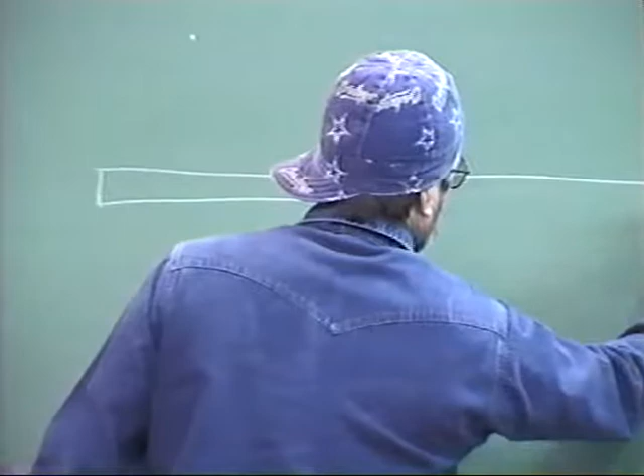What we're going to do is I've got some flanges. First thing we're going to do, we're going to take two pieces of pipe, line them up using framing squares and levels and so forth, and then we're going to tack them in place and make sure that they're aligned.

I'm going to show you how to do this with small pipe in pipe jacks, but then I'm going to show you another technique that will allow you to fit up pipe like this, even if each piece of pipe were 20 feet long and 3 feet in diameter. I'm going to show you a technique to use to line them up.

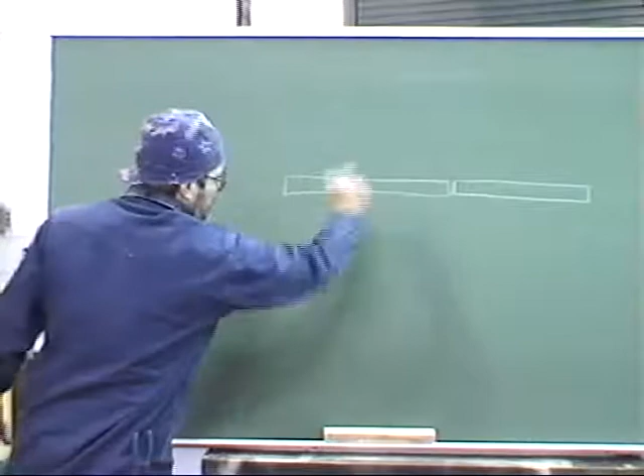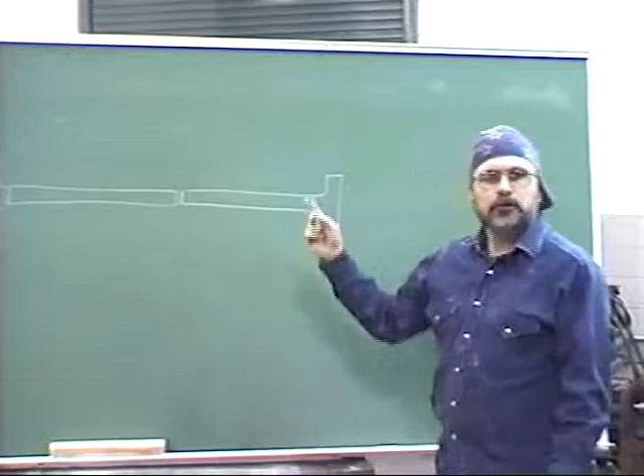Once we get this joint fit here, we're going to put a flange out here on the end, and we're going to square the flange with the pipe in two directions, two dimensions. Then we're going to come down here, put on another flange on this end, and we're going to two-hole these flanges with each other so that they're square with each other and also horizontally level with one another.

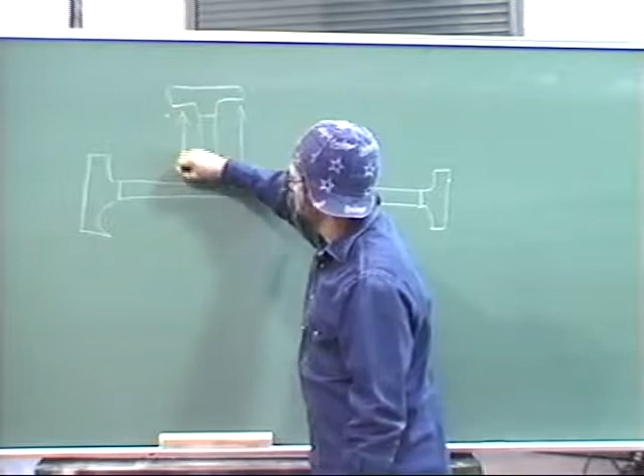Then we're going to come here into the middle of the pipe someplace, maybe here, and we're going to put another piece of pipe on here with a flange on top of it. I'm going to show you how to square the flange with the pipe, both in this direction, but also two-hole with it this way.

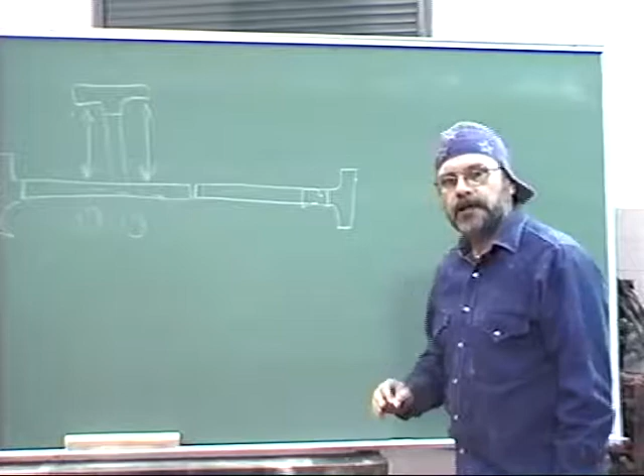And one thing I left out, we're going to put a reducer in right here also, so we'll have a reducer go down to a smaller flange here. So that's basically what it's going to look like. You can see we're going to have 1, 2, 3, 4, 5 welds when it's all done. We're not actually going to weld them out, but we're just going to go through the fit-up techniques.

So first thing I want to do then is read from your book on page 222, all of these numbered items here. This is how your author suggests that you take care of this pipe.

You're going to align the pipe or pipe fitting as closely as possible and hold it in this position. That's your first step. Second step, weld a single tack in place. Third, measure the location of the pipe or the pipe fitting. Fourth, if necessary, adjust the position of the pipe or pipe fitting until it is in the specified location.

Fifth, weld a second tack weld opposite the first tack weld. Sixth, check the location of the pipe or the fitting again, and if necessary, adjust the position. And then finally seventh, weld the two remaining tacks.

So our author says we're going to put 4 tacks in it, and I agree with him. This is the way we always do it. Here's looking on your pipe.

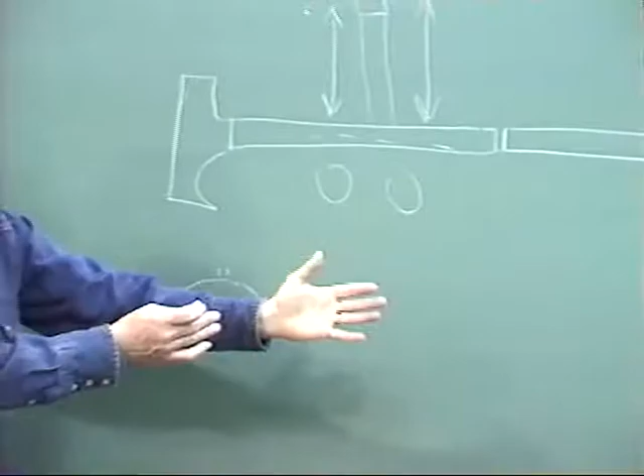Our first tack's going to be right here on top, and then we're going to make sure that our pipe is level. Once we get it level, we'll go ahead and put the tack on the bottom. Now we can still move it sideways. So once we get these top and bottom tacks, we're going to roll the pipe 90 degrees and make sure it's level and square, and then we'll put our other 2 tacks on.

And that's how we're going to make our first fit. Now we're going to do a little tack welding here.

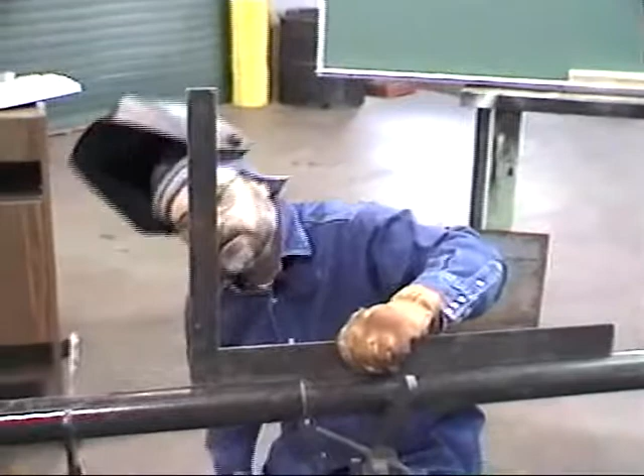Now the way we want to check this, first of all, we're not really all that concerned with these 2 pipes being level with one another right now. What we are concerned is that they're the same elevation. Remember, when we make the fit up, we're only allowed 1/16 of an inch of mismatch on the inside of the fit up. So you can see, well, you probably can't see, but we're a little bit low here.

So I either have to bring this pipe up some or lower this pipe down some. So I think it would be easier just to go ahead and lower this one down. And now my level is touching, and right there looks pretty good.

Okay, now to get a temporary fit, I'm going to go ahead and drop or raise this one here.

Let's bring it in closer. These aren't the best pipe jacks in the world, but not bad. Okay, so that's pretty close.

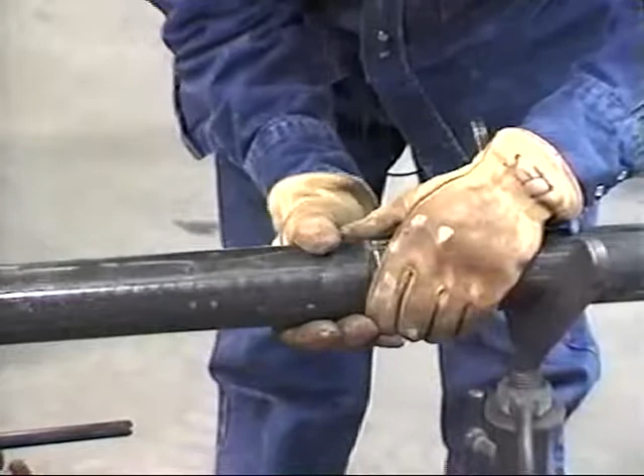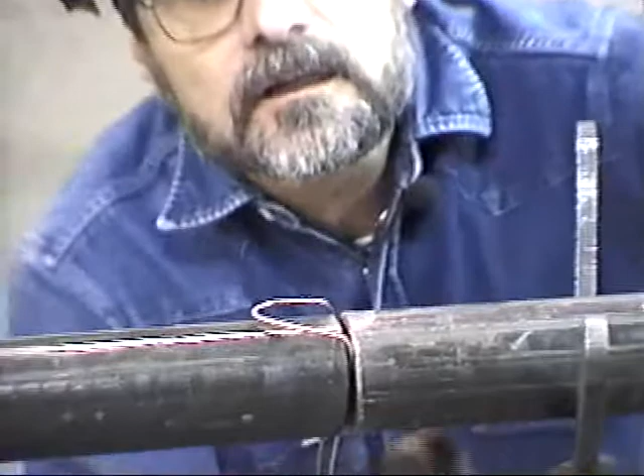Now we want to get our root opening, using a 3/32 gap rod, just like we do when we're welding pipe. I'll grab one I've got laying here. We'll put our gap rod in there like so, and hope it stays. One trick is to bend it like this, put it in, fit it up like so. Okay, that's pretty close right there. So we're going to put our first tack on. Cover the eyes.

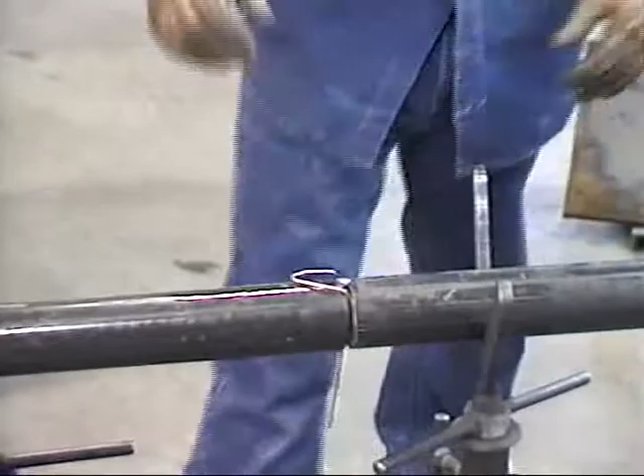Now you can see I'm using MIG to do this fit up. MIG is real convenient to do fit up, especially if you're working by yourself.

Now you can see I rotated the pipe. What I can do now to make sure we're level is put two levels on it, like so, and just check the bubbles.

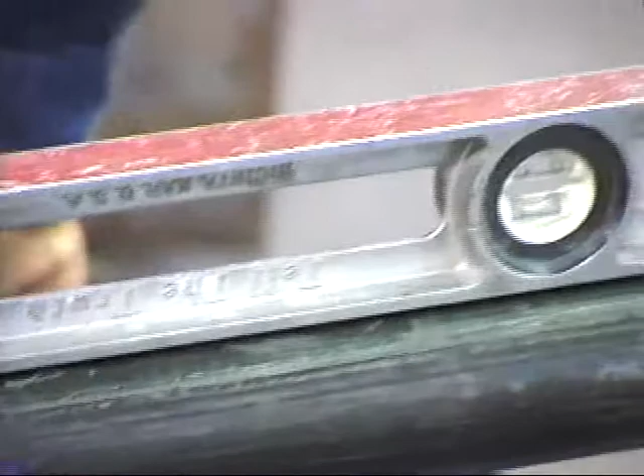This one is riding the right-hand line. This one is riding the left-hand line. So we're going to have to bring them in, starting by leveling this piece. I'll just lower this.

Correction, I'll just raise this. There we go, till that's level. Check it here.

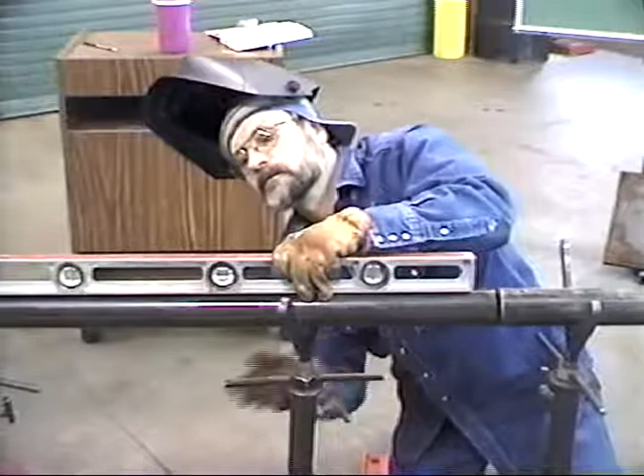Wish I had some better pipe stands. This pipe's awful light for what I'm doing. I just don't like these pipe stands.

Okay, right there. So we're level here, level there.

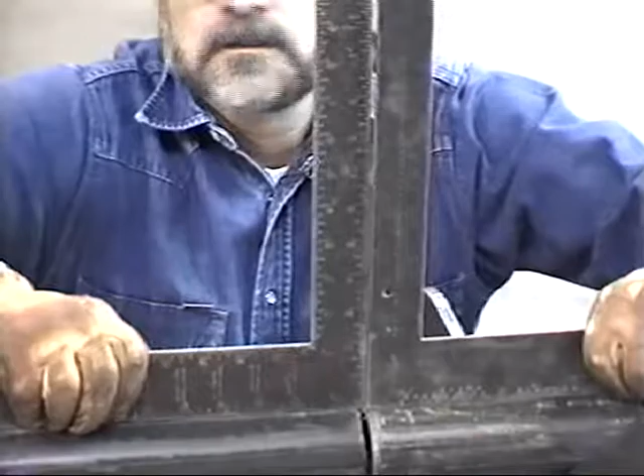Now a way to check it is to use two framing squares. Put a framing square on each, bring it in, and you can see at the top it's touching, but we have about a 3/32 opening at the bottom, so we've got to make an adjustment somewhere. We can make that adjustment by dropping this in, and that'll kick that in.

I probably should have used heavier pipe, it would have been easier. All right, let's see what we have now. Also, if you have a helper, it really helps a lot to do this. Still not there, but we're closer.

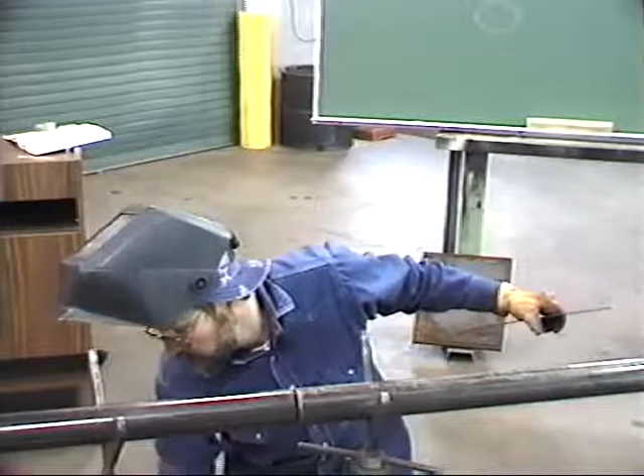So let's drop this in a little bit. See what we've got now. Still not there. These pipe stands are just a pain in the butt. Okay, now that's pretty close right there.

So I'm going to put a little bridge tack on there. Notice I said a bridge tack - that means that tack will be removed before we make the weld. Cover the eyes.

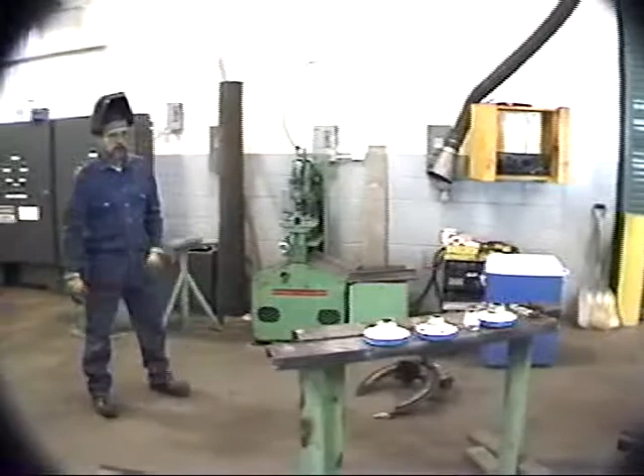Okay, now we're going to rotate the pipe 90 degrees. But before we do, let's take a look at it, step back and look down the length, put an eyeball on it. Okay, we got a little bit of a dog leg in it, which was to be expected.

Check it again. Okay, that got most of it off. So now we're going to go ahead and rotate it because we're going to be pretty close right here. Put our squares back on. Okay, it's got to go down in the middle.

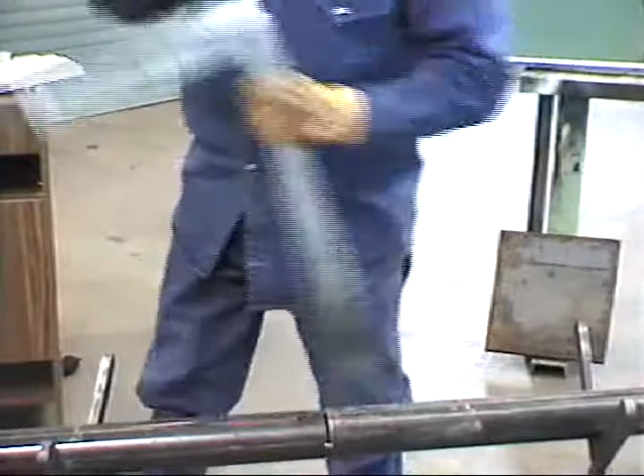Okay, that's fairly close. It came down a little too far. Okay, there we go. So now we're going to go ahead and put a tack here. We've got them aligned. Eyes. And I rotated the pipe again, and I'm going to put my last tack in.

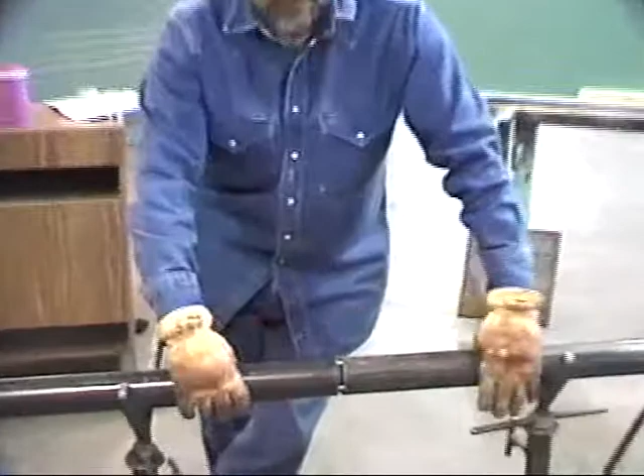Now, one thing I want to draw to your attention is, if you can get a look at this joint, you can see that's pretty wide - more than 3/32 of an inch, and it's not very consistent. The reason is this piece of pipe was cut crooked. We just cut it up here for demonstration purposes. We really didn't take the time to bevel it and get it fit up to where we had the proper root opening all the way around. Root opening on something like this, depending on the process you're using, would typically be 3/32 of an inch. So now we've got this on here - that's the first step of aligning this.

But now imagine we had pipe that was, let's say, 12 inches in diameter, and we had two 20-foot lengths. The same kind of thing you might come across if you're in pipeline welding, out there with your own truck. It's easy to line it up here where we got rolls and a little welding machine and levels and squares and everything, but how do you line up something that's that long? There's a little trick to it, and I'm going to show you what it is right now.

Okay, now if you can imagine this stuff being 12 inches diameter, each stick 20 feet long, what you can do when you're out there in the field - and I've done this often in welding shops. For many years I worked in code pressure vessel shops, building pressure vessels and piping to the ASME code for use out in the oil fields. If you have two long pieces of pipe and you want to make sure they're lined up properly, just get a couple of studs. In this case I'm using a couple of little bolts, but you can use the butt end of a used welding electrode, or just anything you can tack weld to the edge of the pipe.

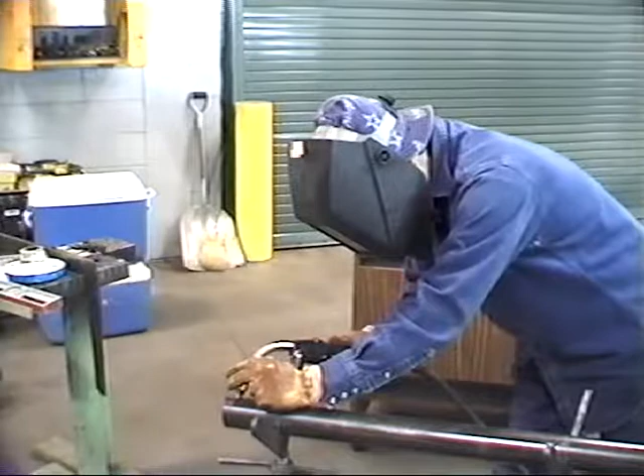Eyeballs. Well, now we've lost our ground. Let's try this again.

Okay, next get yourself a chalk line or a piece of string, and we're simply going to stretch a line from one of these to the other.

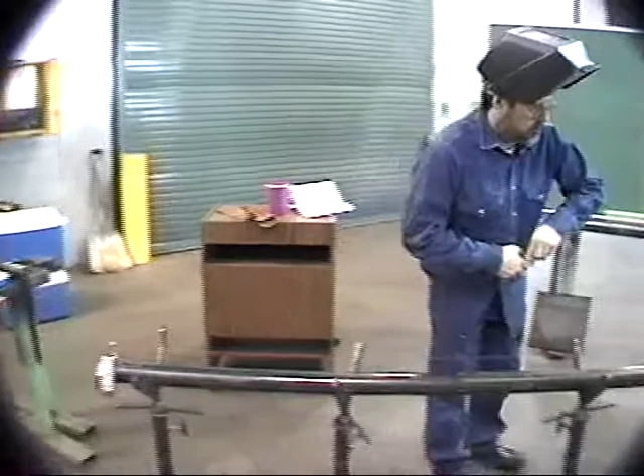Then with your tape measure, measure the distance from the top of the pipe to the line. I've got 1 7/8 of an inch to the bottom of the line there, and here I have 1 7/8 of an inch to the bottom of the line there.

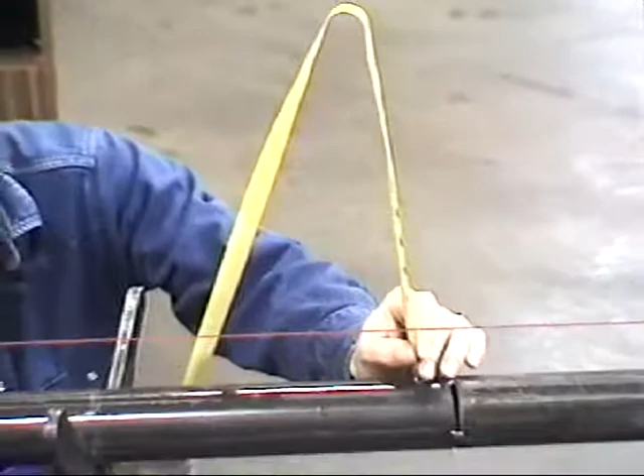Well, just looking at it now, I can tell we've got a slight bow here. And I have 1 15/16. So it's about a 1/16 of an inch lower here than on the ends.

Now this is just a small piece of pipe right here. If we were actually stretched over a 40-foot length, although we have 1/16 of an inch on this small scale, if we were working with 12-inch diameter pipe and this entire run was 40 feet long, that 1/16 of an inch difference would translate to about probably 3/8 of an inch. We would probably be off about 3/8 of an inch here over such a long run.

So you can simply stretch a string and align your pipe in this manner. And of course, when you're out in the field, what you're going to do is you're going to set it on the side, so it'll be laying down like that, and you'll move your pipe inside and out, and once you get it, you'll make your tacks, and then you'll roll it 90 degrees, and then you'll get your next bit. You simply have to move these. Excellent way, quick and easy way, and an accurate way to make sure you've got those pipe aligned properly.

Okay, our next step.

Now we're going to go ahead and attach a flange to one end. Now again, I haven't beveled this pipe, I haven't cleaned it up or prepped it very well.

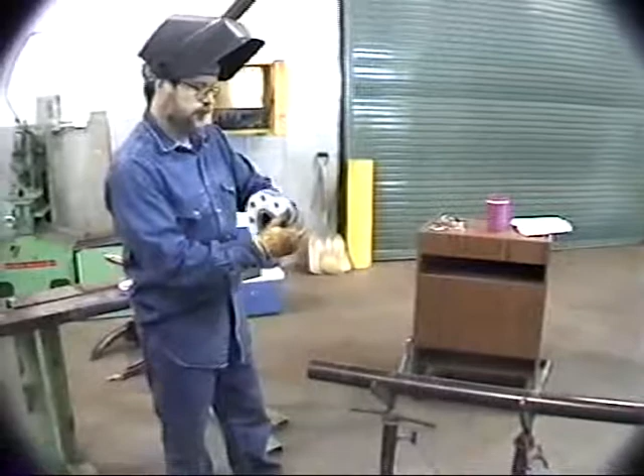What we're going to do is we're going to take a flange, and it's got so much paint on it I can't read it. But looking from how high that face is raised, I would speculate that this is probably either a 300 or a 600 pound flange. And what we'll do is we'll get our 2-hole pins and we'll line it up.

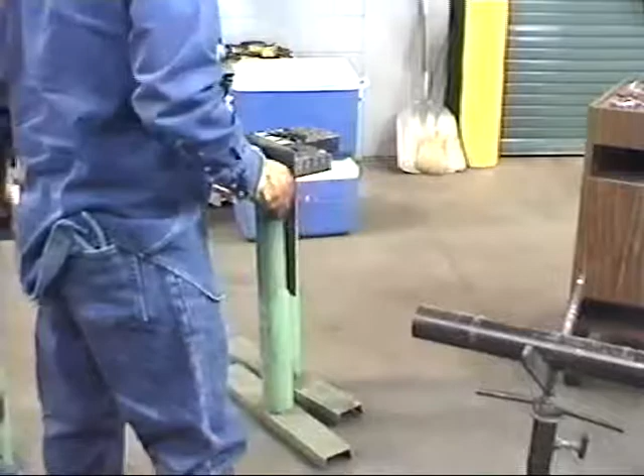Actually, we don't even need to use the 2-hole pins for this first one. We'll just set it on here like this, get our gap right here on the top, and I'll look inside to make sure that the ID is lined up with the ID here, and then I'll just pull it out a little bit and get our tack. This is much easier when you have a helper, but I don't have a helper today, so I'm going to try it on my own.

Since I'm working on just blank pipe right now, I don't have to worry about 2-holing it at the moment.

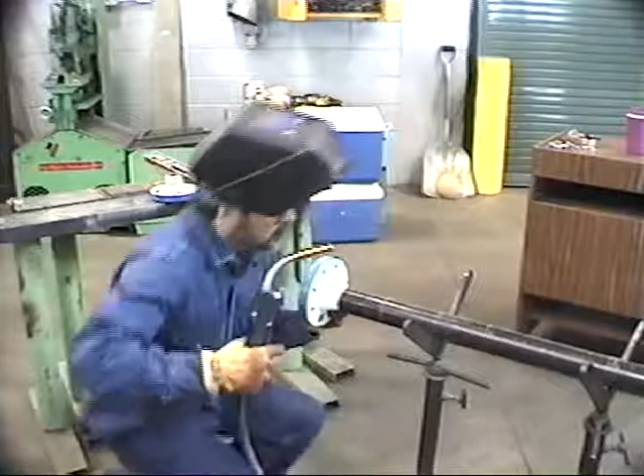Okay, that's our first tack. Next thing we want to do is check the level on our pipe.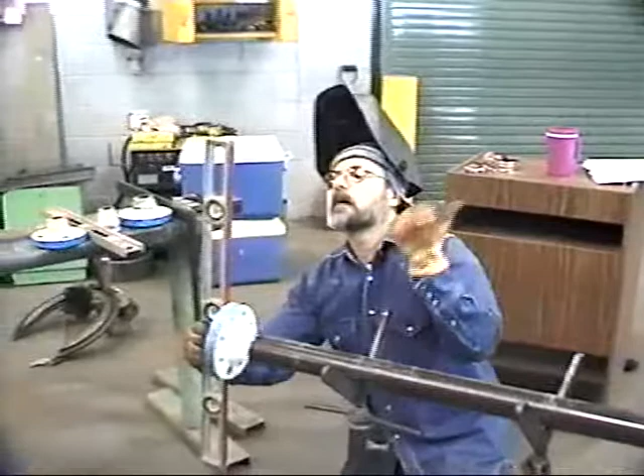Okay, once more, I'm riding the line on that side. So, I want to put this on here, and I want to ride the line on that side as well. So I've got to knock it down a little bit like that.

First of all, check your sides, though, to make sure it's lined up. Check your ID to make sure that's lined up. Remember, when you tack a weld, it's not only going to pull this way, but it'll shift sideways as well. So check your ID. Now, if you have to hit one of these flanges, make sure you hit it out here on the area away from the face. Don't ever hit on the face here, or you'll mess up that face and you won't get a proper seal. So we're going to hit it.

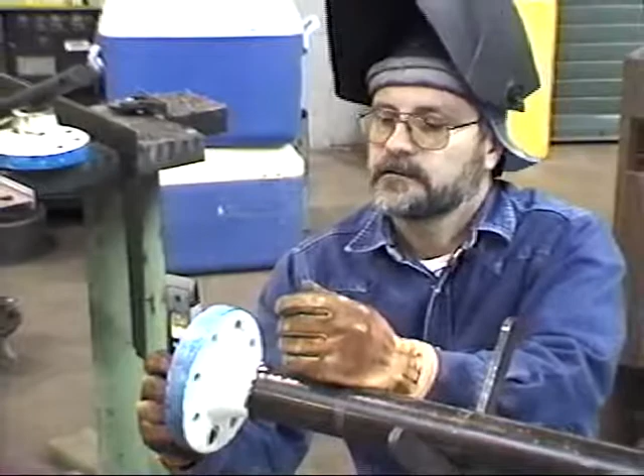Check it again. And because I didn't prepare this accurately enough, I'm going to have to re-tack it. Not enough room. Eyeballs.

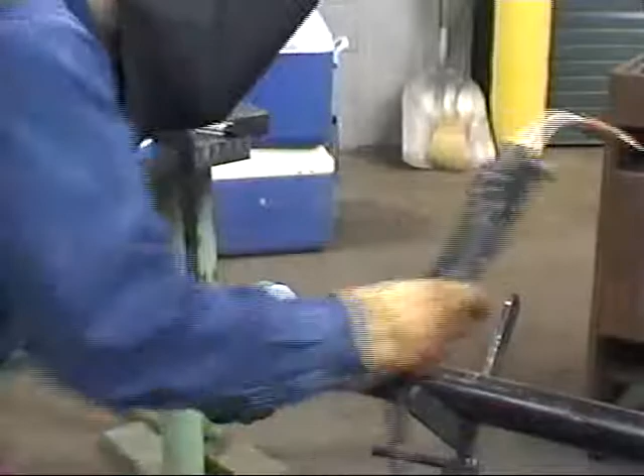Okay, check it again. Check it here.

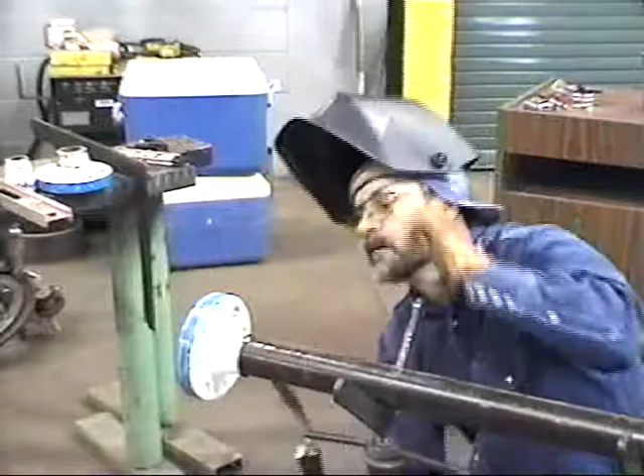Now we're going to tack it on the bottom. Then we're going to rotate it 90 degrees and check our level. Adjust it as necessary—I came a little too much.

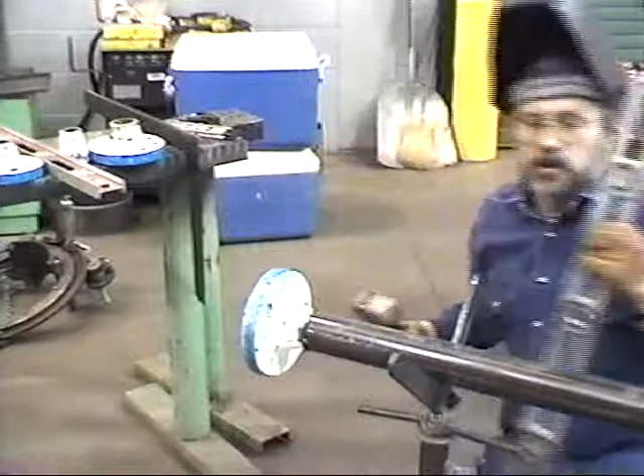Sometimes, once in a while, you'll find yourself in a situation where you can't get away from hitting the face. If that happens, use a piece of wood, a 2x4 or 1x4, lay it up against that face and hit the wood.

Okay, now that's where I want it. I left it just a little bit out because when I tack it, the tack's going to draw, and that should pull it fairly close to even.

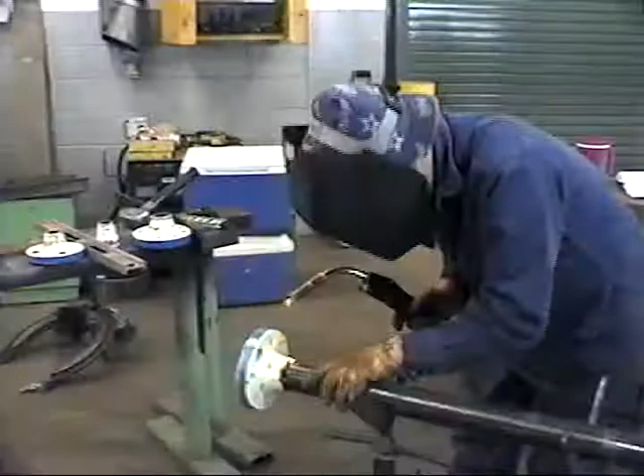Okay, our first flange is on. So we've accomplished two tasks—we've got two welds ready to make now. Now we're going to move down here to the other end and put on our reducer.

Now this is, I believe, a 2.5 to 2 inch reducer. 2 1/4—okay, it's 2.5 to 1.5. Oh no, pardon me, a 2 to 1.5 reducer. So we're going to put this on like so, and tack it on here, just about like that, right there. So again, our gap rod in here.

Check to make sure it's aligned properly. And we're not getting the ground. One reason you don't get a ground, or you lose your ground like this, is because of the coating that's put over top of the metal. So you've got to make sure you get a good ground. That's two or three times now I've lost my ground because of this coating put on the steel.

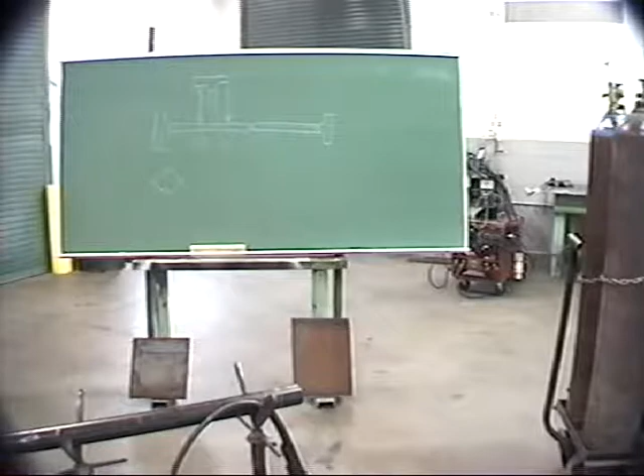So what I'm going to have to do is come over here, put that there so I'm making ground, and then we'll hook it up to here. That also illustrates why you have to clean your pipe up before you try to weld on it—you've got to get all that stuff off or else you can suck it into your weld. Okay, here we go again. Let's try it one more time.

Okay, that's our first tack. Now we've got to square this with the pipe. So you're going to want to take your level, check the face, and check it here. All right, we're just barely riding that line, so we're going to want to knock this down to where we're just barely riding the line.

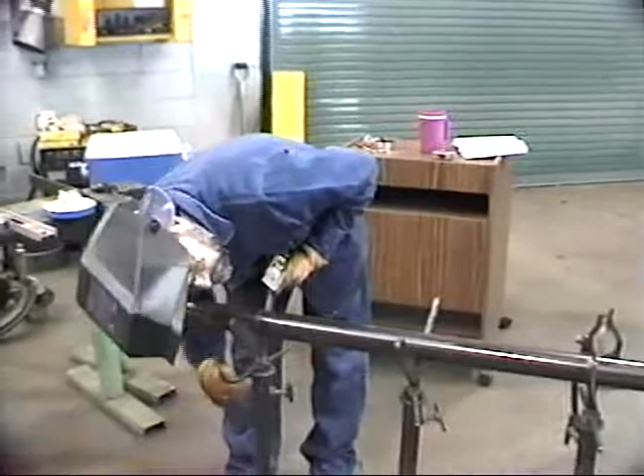Again, remember that we're using bridge tacks, which will be removed before we make the final weldment. Then you're going to rotate it 90 degrees, do the same thing, check it here. Okay, that's level. Check it there—got to go down some. Okay, that's good.

Lost that ground again.

Having a helper really makes this a lot easier job. And actually, being a helper is where a lot of people learn how to do this stuff. Working with a fitter, that helper gets invaluable experience in all of these little tricks and techniques.

Okay, at this point, now we need our two-hole pins, so let me step into the tool room there and grab them.

This is a two-hole pin. It has a little spring here and a little clamp—you press on this clamp and that'll slide off. What you do is put this into the bolt hole of your flange, slip this in on the other side, push it up tight and it'll lock. This is better than trying to just use bolts—a lot of people will just slip a bolt in there, but bolts are sloppy. This is much more accurate, so you want to make sure you use two-hole pins whenever possible.

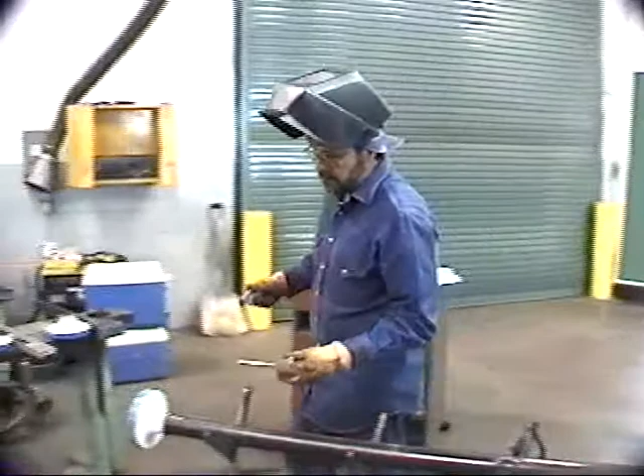So I'm going to come down here and we're going to two-hole this one. Put in that two-hole pin. You want to get as wide a reach as you can, so I'm going to skip these two center ones and drop down a little bit so I've got a wider expanse. Then we'll put our level on there, like so. Rotate the pipe till it's level. Now comes the tricky part.

Tricky part is getting it apart. Well, my two-hole pin seems to be broken.

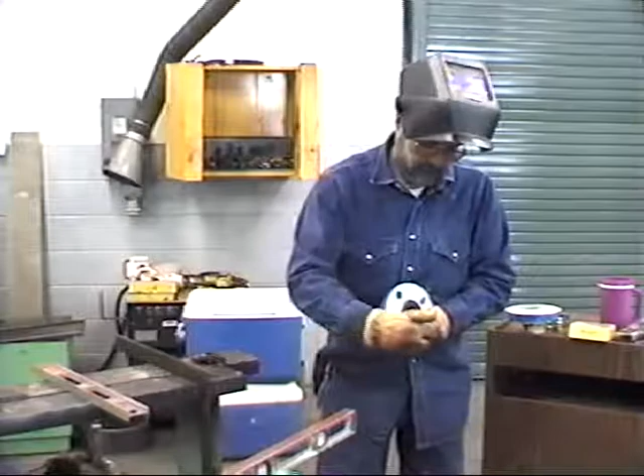Okay, now we're going to go with our smaller flange on the other end. So we'll put this on, and this on. Now if you look at that, there's only four bolt holes on this flange, and this is also a raised face 600-pound flange.

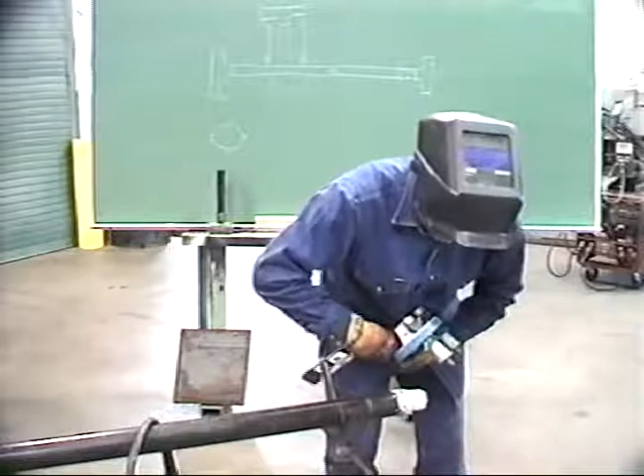So we're going to take our other level, and where'd our gap rod go? Aha, we've got our gap rod. We're going to stick our gap rod in here. We're going to put our level on here. Line it up.

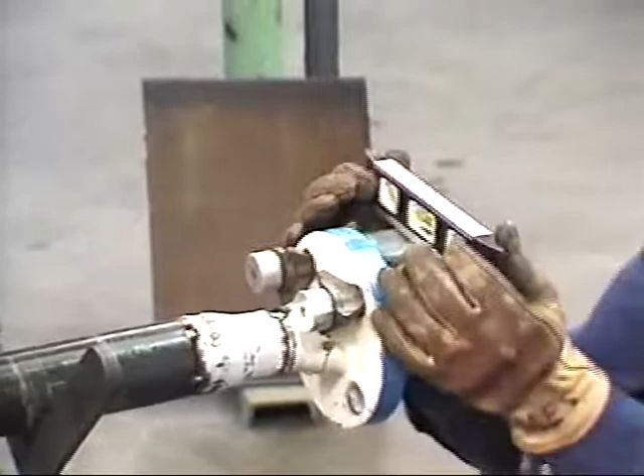This is where these quick change welding hoods really come in handy. Okay, not bad for being out of practice. Alrighty.

So we're two-holed there. It's off a little bit here. It's got to swing a little bit, so we've got to keep this pipe from moving. Fortunately, this is mild steel pipe, and I can just go ahead and tack it to keep it from moving for a moment. So I'm going to put a little bridge tack on it.

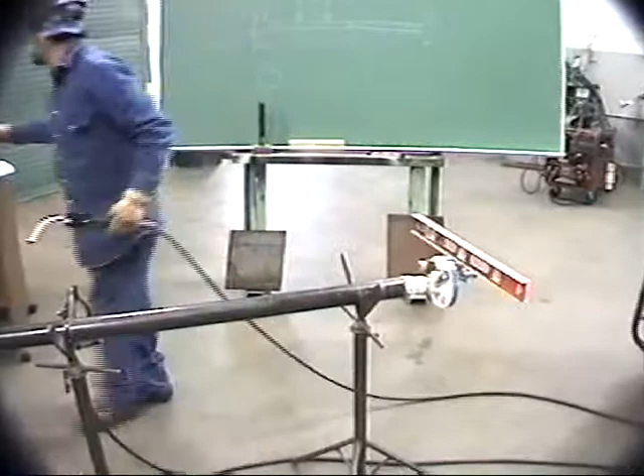That's level. We got to swing a little bit with this. Okay, that's level. So this and that, both flanges are two-holed to each other.

Another good way to check is to shove your level all the way back up until it stops against the two-hole pins, and do that with both of them, on both ends. Shove it all the way up until it's tight against the two-hole pins. Then just put your eyeball across there. Look across the top of this, and then look across the top of that other level. Keep looking at it like this, and you can make sure that the two are lined up.

Just off a tad. It's got to swing just a little bit more. So that's a final way to check, because you never know if your level is going to be off a little bit. But typically, if you've got a nice straight edge, you can use that technique, put your eyeball across there, and make sure they're properly lined up.

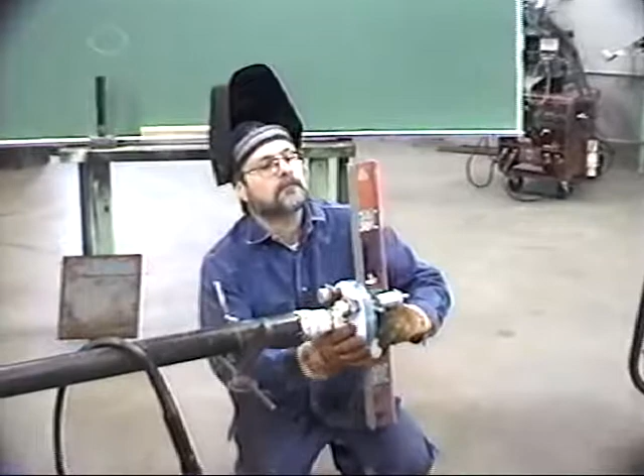Okay, once we're sure of that, then again, we've got to come back here and check to make sure that second flange is aligned. So we're going to put it on the face of the flange. And in this case, we've got to go out with it a little bit. And that's just right.

Okay, so now we're ready to put our second tack in, and we'll tack it on the bottom. So we're good there. Then we want to go ahead and rotate it and check it again. Okay, and tack it.

Now one final way of checking these is with your tape measure. If you're going to fit, you've got to make sure you know how to read a tape properly and accurately, down to a 1/16 of an inch. Most of these codes will allow a 1/16 of an inch. Pressure vessels usually allow an 1/8 of an inch. But you need to be able to read a tape measure if you're going to be a fitter.

Put it on there and come over. 81 1/8 of an inch to the face, okay? Rotate it, check the other side. 81 and just over 1/8 of an inch. So we're within about a 32nd that way.

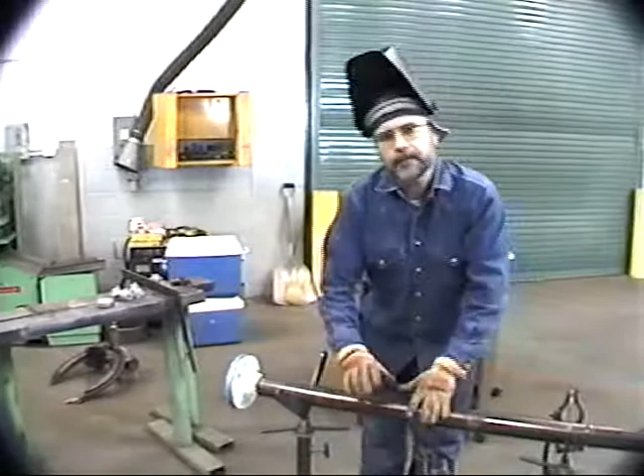Now, one other thing I want to point out to you. If you have to cut a piece of pipe and put a couple of flanges on, and that pipe's going to go into an existing system, it's going to hook up to something. One thing you need to be mindful of is the thickness of the gaskets that are going to go in here. Whenever you calculate how long that piece of pipe should be cut, you've got to deduct for the thickness of your gaskets, and deduct for the root opening on every weld that you're going to make. Otherwise, you're going to cut your pipe too long. If you're going to cut a pipe wrong, it's best to cut it too long. But with practice and experience, you'll get to where you can cut them right the first time, every time.

So now we've done 4 of our welds. We're done here, we're done here, we're done here, we're done here. So now we just have 1, 2 more to do. Excuse me one moment while I gather that up.

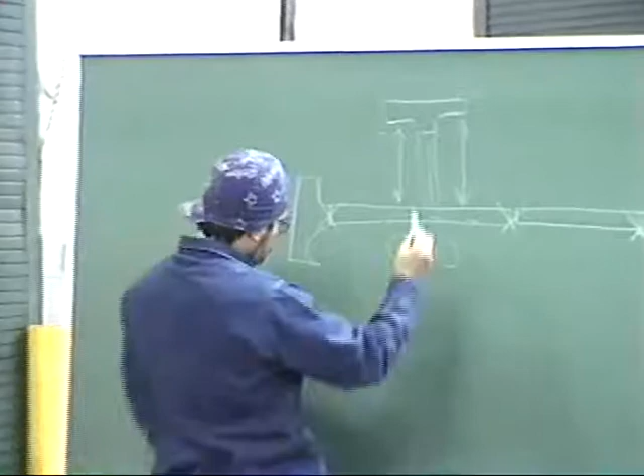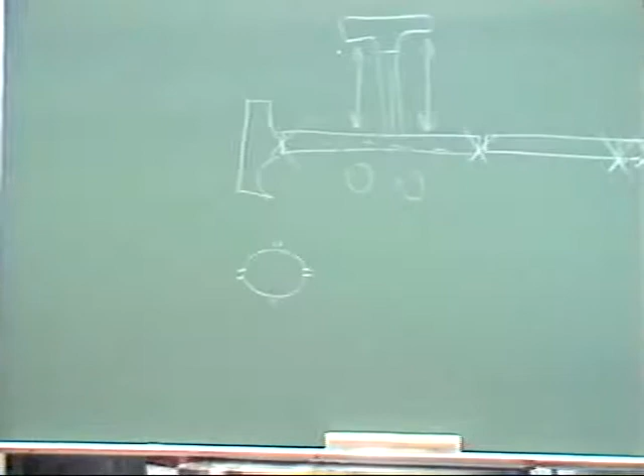Okay, what we're going to do now is put on our branch, and we're going to put a flange on it. Typically, the flange is welded onto the branch prior to installation on the header or the main piece of pipe. So what we're going to do is take our little flange here, and let me drag this over. Find a relatively flat place, lay that down, put our gap rod in there, move our ground, and then set our pipe.

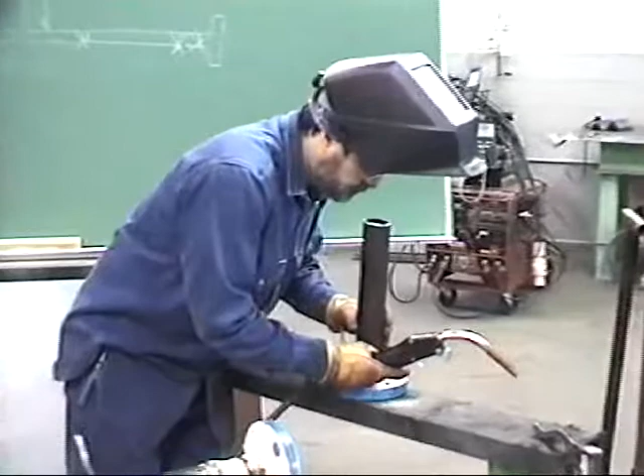Eyeballs. Okay, same thing here. We've got to square everything up.

So now I can lay this on the back of the flange, and when you do, you want to make sure that you're running with your bolt holes. That way you keep everything square. Okay, it's perfectly level right there. Let's take out the gap rod now.

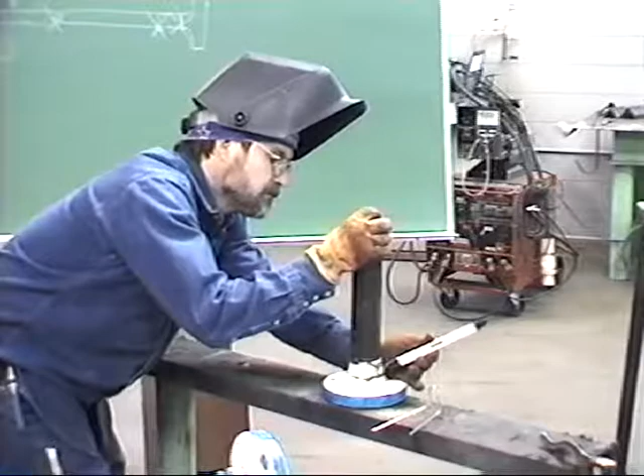Got to open it up some. Okay, we'll put our second tack in. Lost our ground. I hate it when I lose my ground.

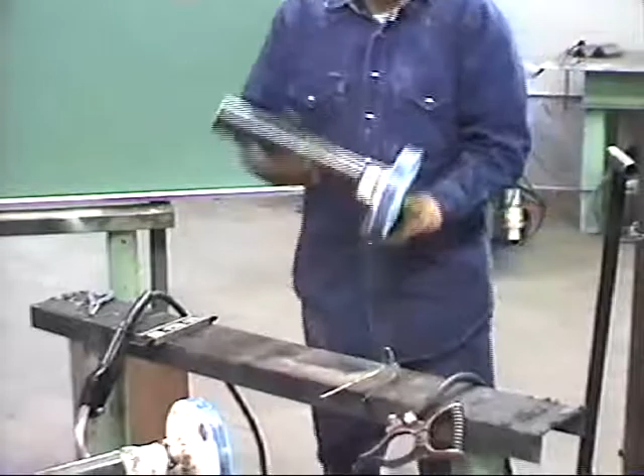Eyes. Okay, then now I can tell we got a heck of a dog leg in there already, so before I try to check it with my level, I'm just going to go ahead and make some gross adjustments to it, and just eyeball it fairly close. Like so, then set it back down.

Recheck. Okay, it's level. Okay, it's got to scoot over this way a little bit, so I'll put this tack in first, and that should draw it enough to where it's pretty fairly level. Eyeballs.

There we go with that darn ground again. Then finally come over here and put your last one in.

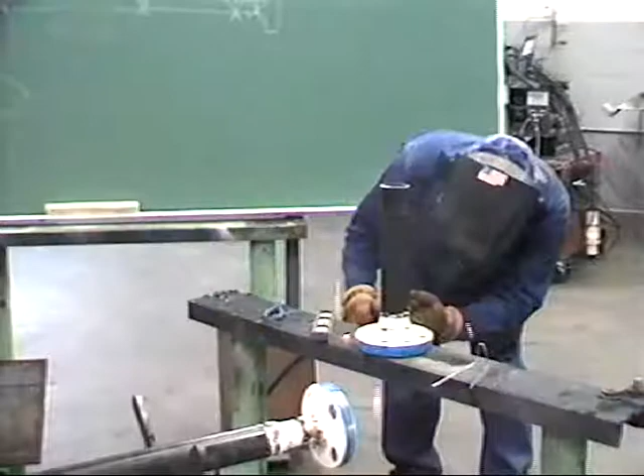Okay, now typically, of course, you'd go ahead and complete this weld now before we ever put it on the pipe. Now the way a branch is usually attached, there's actually a couple of ways.

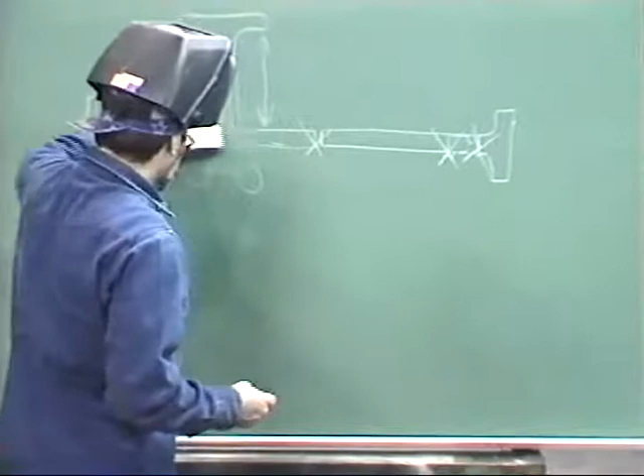And somewhere in here, you might put a T. If you were to put a T in, you'd have 1, 2, 3 more welds. Okay? Another way to do it

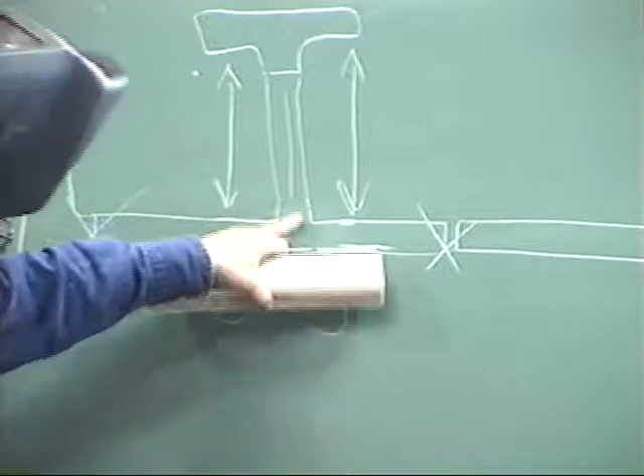is to simply nestle the branch into the header itself, like this. Then you have one weld.

Under ASME Section 8 pressure vessels, this is allowed, but you don't typically see this out in the field anymore in piping. Almost always now you'll see a T-joint put in there.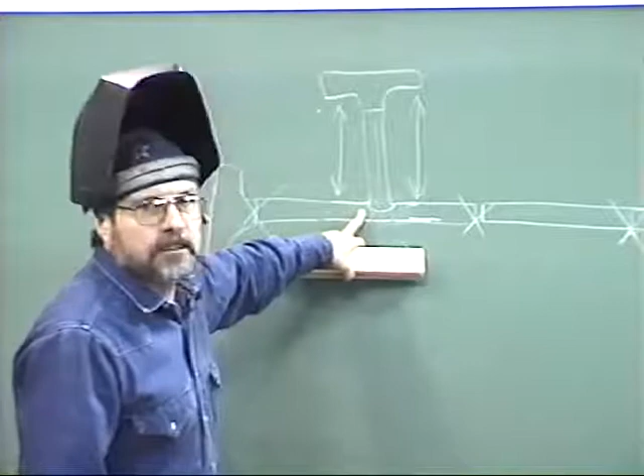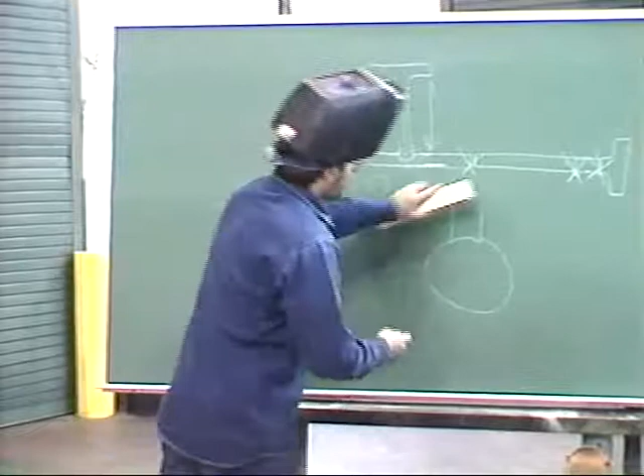If you have to fit it up like this, here's the inside of your pipe. This is our branch running up. Then you're going to want to radius this pipe to the ID of the main line. That way you don't restrict the flow any. And when you fit that up, you can only have an 1/8 of an inch root opening all the way around it.

So this would be your branch coming down, and then you'd have an 1/8 of an inch root opening all the way around. Full penetration weld is required.

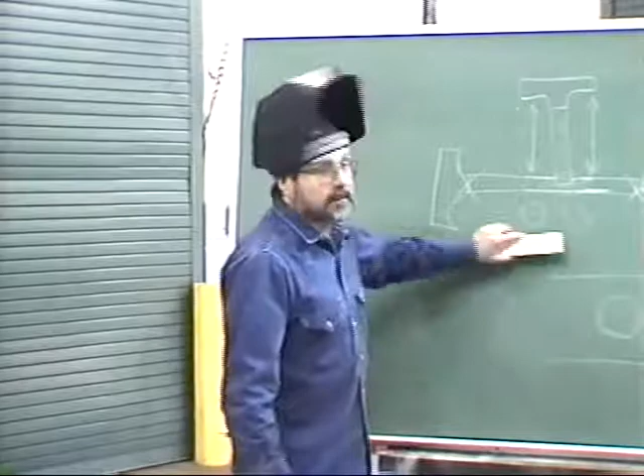Now, I have not taken the time to prep this to do a fabricated branch like this, and I don't have a T. So I'm just going to go ahead and tack it to the surface of the metal simply for illustration purposes.

Now, before we do anything, we have to find the center of the pipe. So we're going to put our two-hole pins back on. Now I'll use the good ones. And we'll level it.

Now I don't want it to move, so I'm going to go ahead and weld it with my little brace to keep it from moving. Eyes.

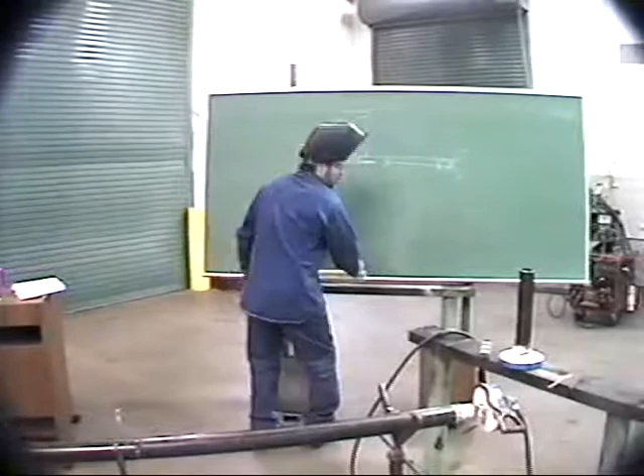Okay, it's leveled. Now our branch has to be level. If we're looking at this end on, here's our flange. Here's our pipe opening, and our branch is coming up like this. And that's what it looks like if you're looking at it from end on.

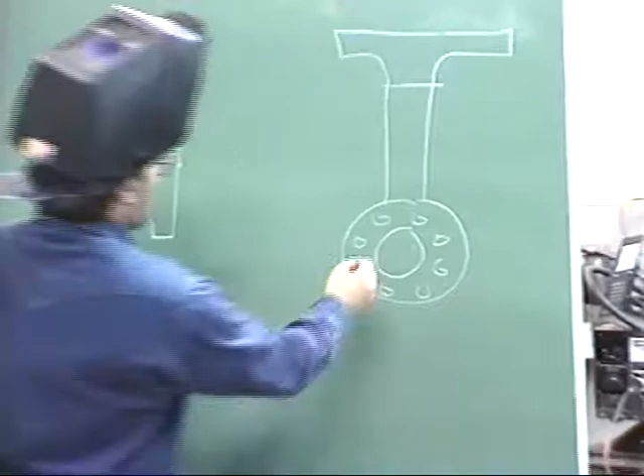Well, we've leveled this, so now this has got to be level, and the center line of our branch has to be even with the center line of our pipe. How do you do that? You've got to find the center of the pipe.

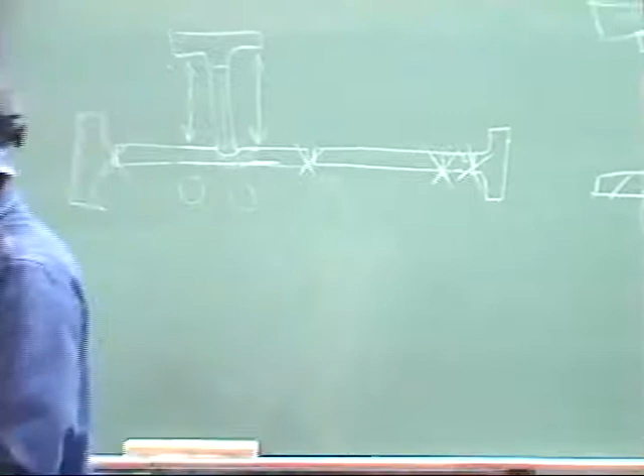Now you could use a little instrument called a center head. Now if you look at this, you'll see it's got degree marks across here, and then it's got a little bubble level right in the center. These things are pretty handy if you don't have to do really critical, really accurate work.

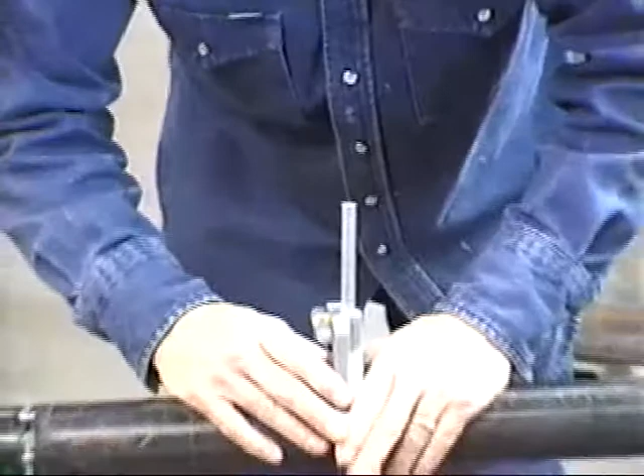Just for typical pipe fitting where you have like 1/8 inch tolerances, you can simply take this and cradle it on the pipe, check your level, make sure your two-hole is level, and then there you have it. So we just set it on here like this, right like that, and then just give it a light tap. And I say a light tap.

This is not a center punch. You don't want to really crank on it. You just want to give it a light tap, and then you've got a little hole there. Now you can go ahead and get a center punch and really punch it. Now, according to our center head here, that is the center of our pipe.

Well, I have a bad habit of not trusting center heads. Like I say, they're great for rough calculations, but to really be sure, you want to use a level and a tape measure to find the center of your pipe.

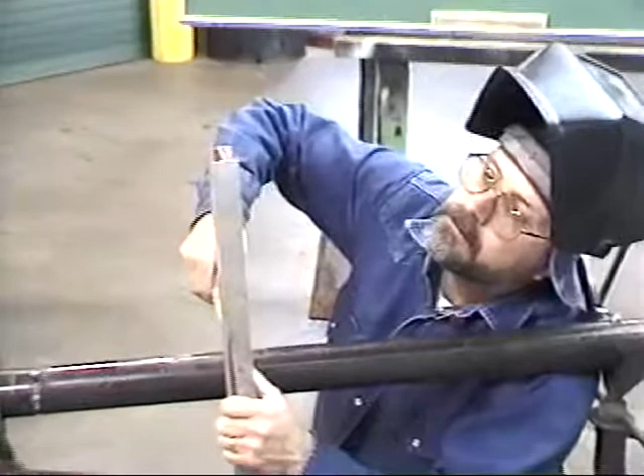And the way you do that is to simply lay your level on the side of the pipe and level it up. Use your tape then to measure. You go until it's level, and then you look. Okay, I've got 1 3/16 of an inch to that little center punch from the edge. Now I come over here, I'll check it again.

One 3/16. So we are accurate enough. That center head was accurate enough to go ahead and use it. So that's another way of finding the top dead center of your pipe, which you're always going to have to do. If you don't have a center head available, use a level and a tape measure.

Now at this point, if we were going to just fabricate this, we'd go ahead and lay this out, cut it, clean it all up, make sure you dig any trash out of the main line that happens to fall down in there before you ever make your fit up. Then you'll make your fit, and in this case, since I don't have a T, which is the way it really ought to be fit, and I'm not going to take the time to cut and bevel all that, I'm just going to go ahead and make this, put it on here like this.

Well, how do you know that it's level and running the same as this pipe, as our main line? Well, what you can do is rotate this 90 degrees, put 2-hole pins in it here, and rotate it until you're sure.

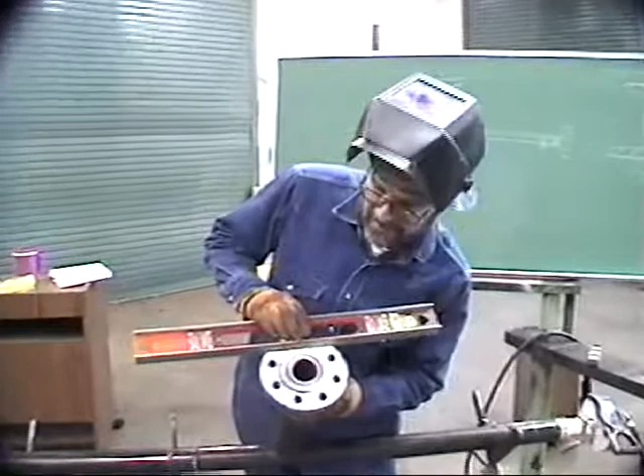Now, if you don't want to do that, or you can't do that, say this is fixed in place and you can't do that, then the way to check that is to take a level or a straight edge and rely on your eyeballs. You simply take this and line it up with a couple of the 2 holes like that. Then you know that the level is running square with the flange.

Once you've got it lined up square with the flange, trust your eyes. Look down the edge of the level and align the edge of the level with the side of the pipe. Then you can accurately, and I mean accurately, line it up. Right there.

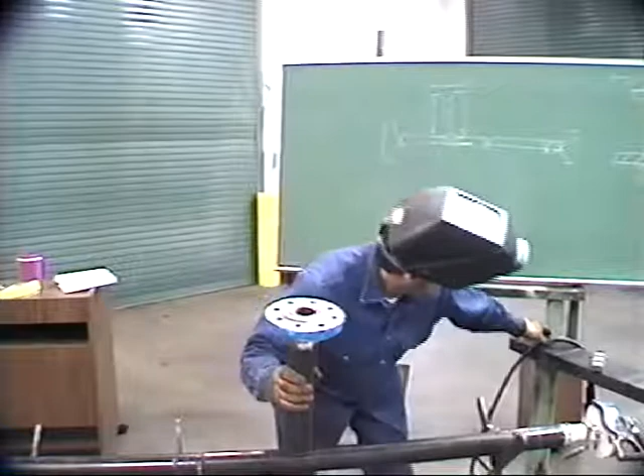And again, I wish I had a helper. So let's see if I can do this one-handedly. Let's check that one more time to get it close. Keep it close.

Eyeballs. Got to check it one more time. Why? Because we're off this way. Now that might throw our alignment this way off.

So what we want to do, raise it up with that one tack in it. Now if you can't, one really neat thing to use, if they're available and you have time, is to use what we call little pipe jacks. All they are is a piece of pipe with a bolt stuck in the end of it, and you can actually tack them here, then loosen them up until they come up snug here, and the flange just basically rests on those. You can make whatever minor adjustments you have to make sure you get it just perfect.

Now I happen to be really close here. Okay, we're riding the line there. I don't have room to set this here, and I don't want to go across that joint, so I'll come over here and go underneath, and I'm riding the line there. So I need to go over that way with it a little bit, like so. I want to hold it over there, so I'm going to use my MIG pliers as a little wedge right there.

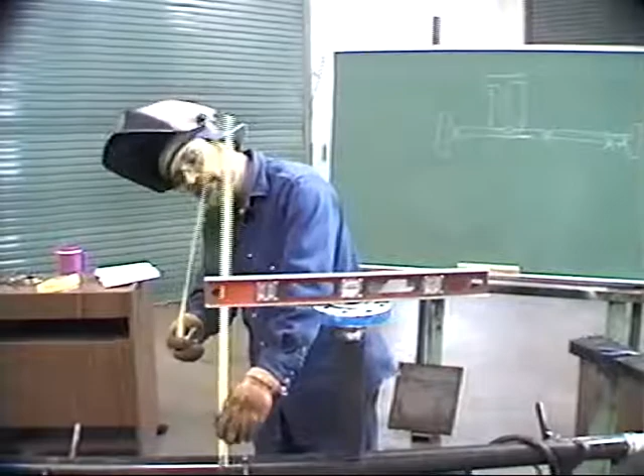Now, the final check on this thing, to make sure we're running square with the pipe, go back to your tape measure. Why? Because now you can get way out here on the end with it. 14 3/8. 14 7/16. So we're 1/16 of an inch off, which means we'd have to tap it back over that way a little bit. But 1/16 of an inch isn't enough to mess with, so I'm not going to worry about it.

One more dimension to check, this way. Remember, it's got to be square with our 2-hole, so we've got to come over this way with it quite a bit. Quite a bit. So we're going to take and just pull on it gently and smack it with your hammer. Still need to come over a little bit more. I'm afraid to hit it too hard.

Okay, still level there. Okay, it's close enough that I believe I can weld this side and draw it back in. So I'm going to make a tack here.

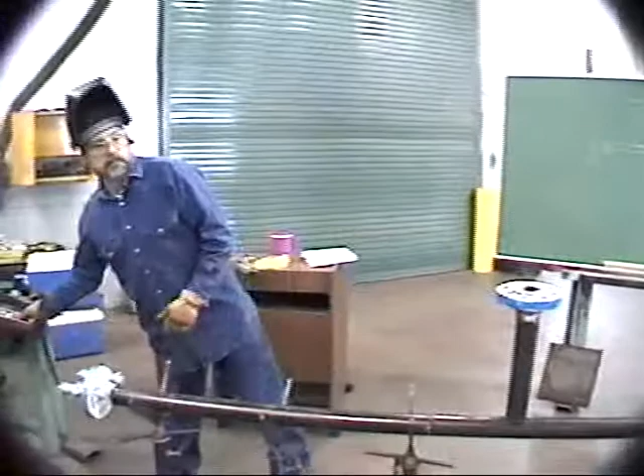Now remember, typically you would have a T in here, or this would be nestled and blend in just right with it. Since I didn't have one, I just went ahead and set that on there like that. So those are the basic techniques for putting this pipe run together, and these are also the basic techniques as described in your Chapter 14 out of Pipe Welding Procedures. So I hope that answered a lot of questions and cleared up a lot of things.

If you have any questions, just get with me and we'll discuss them. Before I let you go, though, I want to real quickly take a look at your Chapter 14 text, and let's see if there's any high points I need to hit for you here. I'm going to give you some heads up so you'll know where the questions are coming from.

Highlight on page 222, highlight all of those numbered items, and then highlight the first paragraph beneath it. That begins, usually all or a number of joints are fitted up as described above. Then highlight the last paragraph on page 222.

And then on page 224 where it says pipe to pipe fit up, highlight the paragraph that begins when there are 2 lengths of pipe that must be fitted up. Highlight that. Study figure 14.3.

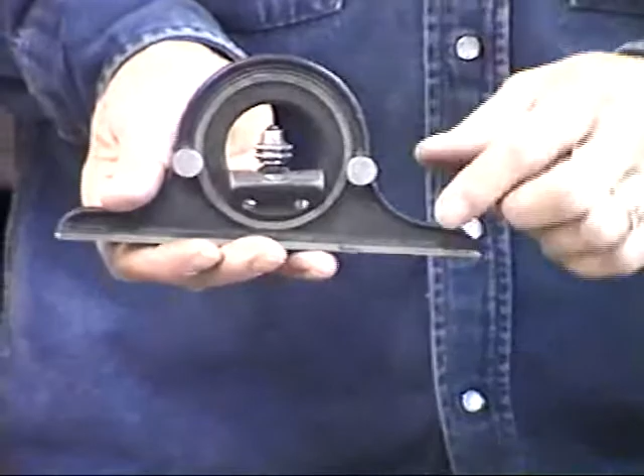Oh, one piece of equipment I do want to talk to you about, and this is mentioned on page 232, and he's using a protractor. This is a protractor. Like your center head, it has a little level in it, right here. And like your center head, it has degrees, only it has 360 degrees.

So you can find any angle you want to. If you look at the picture that he's showing on figure 14.3, he's using this to find a strange angle on a piece of pipe. You got a piece of pipe running down like this. By using the protractor, you can find exactly what degree that piece of pipe is at, lock it in, and now you know what the face of the elbow coming off of that piece of pipe is going to have to be cut at, so that the subsequent run leading off is going to be level.

So that's what a protractor is. If you'd like to see it, just ask me or Mary or Jeff Brager, and we'll get it for you, and you can look at it. There's probably going to be a question on your test concerning protractors.

Let's see, then on page 233, study how he's using a level and a square to align a T. I didn't have a T, or else I would have shown you that. And then vertical alignment. Read about vertical alignment, and then a plumb bob. Very handy instrument for aligning pipe. So read the section on a plumb bob.

And I think that's going to be just about it. The test consists of 15 to 20 questions. I don't remember exactly which, but I think it's 20 questions. And if there's anything in that section, chapter 14, that you don't understand, you're not clear on, get with me and I'll be happy to talk to you about it. Thanks for your attention.